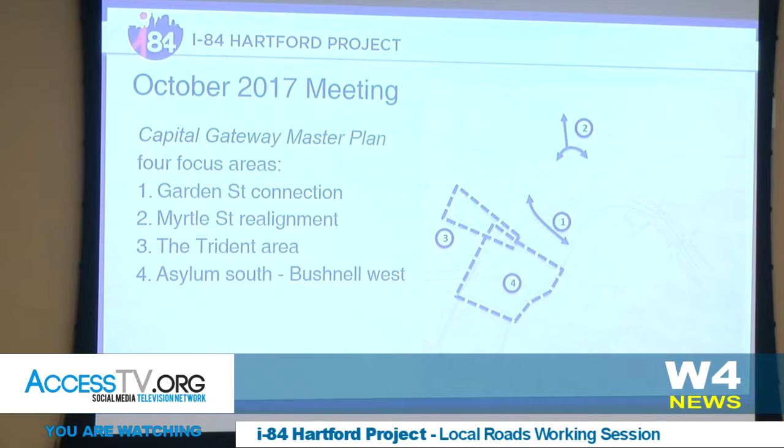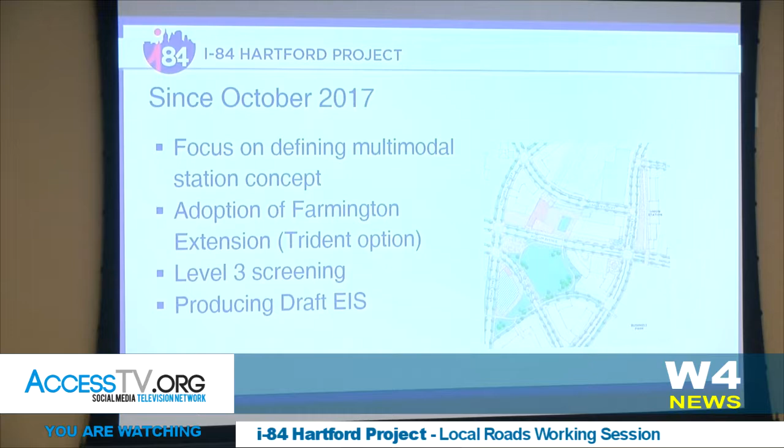So I'm just going to start with a few slides summarizing the overall I-84 Hartford program, where we've gone since October, where we are today in our overall schedule. So since that working session, we focused a lot on defining and screening and designing the multimodal station. Many of you were at the PAC meeting in March, saw how we've now advanced. We're recommending right now that 2 of those station concepts, one of which is depicted here on the screen, advance into the draft environmental impact statement. So that is moving forward.

There is some ongoing architectural design and transportation planning within the station, looking at how spaces are used and those types of next steps that we'll be presenting to the advisory committee either in August or September here in the next couple months. We have adopted the Farmington Avenue extension as the option for that Trident local road area. We are continuing to evaluate 2 other options in the DEIS, but all the exhibits you'll see here will consistently illustrate that Farmington Avenue extension.

We've conducted our level 3 screening, which I have a slide on here in a couple minutes, but we've really been focused on producing that draft environmental impact statement. So that document is due to DOT and Federal Highway this fall, and ultimately after a couple review cycles, it'll be published early next year, and then a public hearing follows for public comment on that document.

So in terms of our big picture schedule, we're really right here, just here in the beginning. So where that line is, we're still about a couple years away from that record of decision. So I did just want to kind of reinforce to everyone that final EIS, that record of decision terminology sounds very absolute and final, but over these intervening years, this design period, and then again, if you draw your eye to that construction line in the late 2020s, there will be many opportunities for the design to evolve.

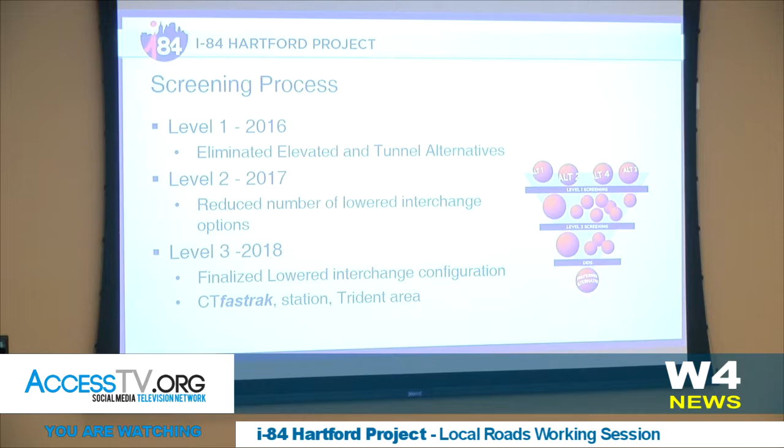So again, there'll be a lot more discussion about the station and CTfastrak at that next upcoming PAC meeting. For now, we'd really like to focus on the local roads. There'll be plenty of time to talk about the Trident, though, at this meeting today. So I'm going to spin off and just give you guys a little bit of our toolbox for how we've done this traffic analysis, kind of bring you up to speed with where we are and what we still have to do.

So the first step to all this has been identifying background growth that was done several years ago in setting up our initial models. And that's about 6 to 7% total growth between now and the year 2040 being the design year. So there is a moderate increase; no matter what we do with the road network, you will see that increase. Now, that is generally low, and we should say that those numbers were developed prior to several large projects being implemented. That includes the ballpark, that includes Downtown North. So as we move through these next several years, we will be looking into updating those traffic models to ensure they reflect the best information we have.

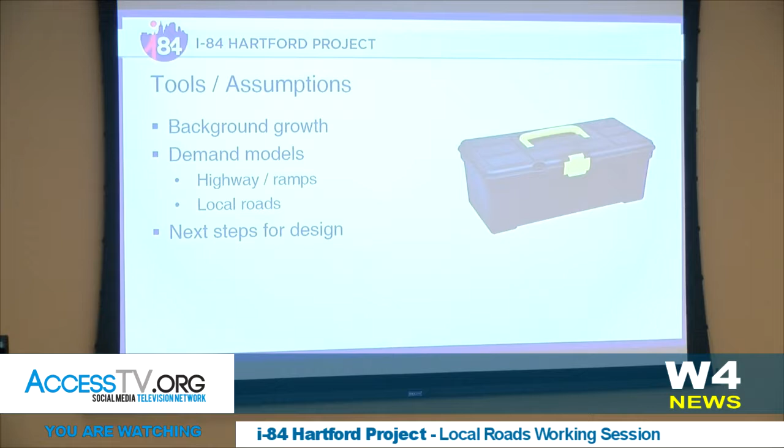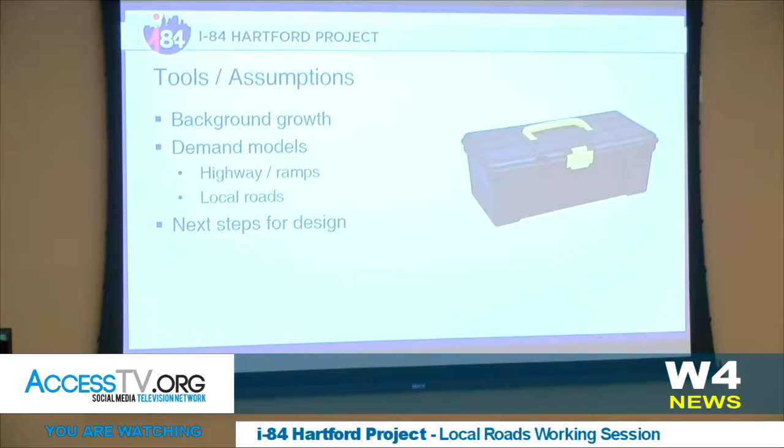So we take that background growth and we use it in what's called the transportation demand model. And that allows us to dynamically assess, if the travel network has changed, when we start moving ramps around, which is a big part of the lowered highway alternative, which I'll show you in a couple slides, it helps us evaluate where those routing patterns move to. So this model is very well calibrated to how the highways, how the local ramps work. However, the further we get away from those highway ramps into the local road network, it's not calibrated quite as well. And that's one of the things as we move forward into design, we'll start to work on.

I should also say, though, we're going to cover in the next couple slides a concept called diversion. And so that's something where you'll start to see cars, the further we get away from those local road increases, they'll start to revert back to the norm. And I have an exhibit to help you understand that here in a couple slides.

So first things first, this lowered highway alternative, because of the nature of it, does require these significant changes to the local road network and to the ramp network. A lot of the ramps we have out there today are only feasible because the highway is elevated or splits into eastbound and westbound at different elevations.

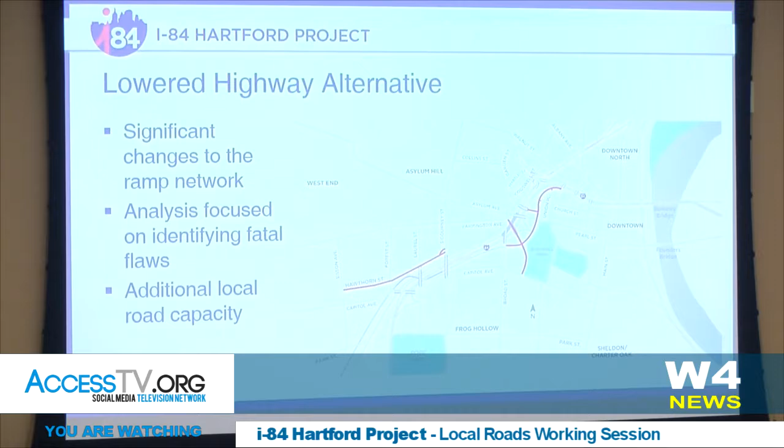Our analysis in identifying the interchange options we have today was focused on identifying fatal flaws. We didn't want ramps to back up onto the freeway, and we established a bare minimum performance for traffic signals. That was an average of about 2 minutes of delay for each user of the intersection. So anything worse than that, we eliminated.

The one thing I would like to highlight on this map is you can see these different red lines. These all depict new local street connections that are not there today. So one of these great opportunities we have with the lowered highway is because of its lessened footprint on the city, it enables us to open up space both for these new local roads and for potential economic development.

So I'm pretty sure I said diversion a couple of minutes ago. Thanks for no one making a face at me.

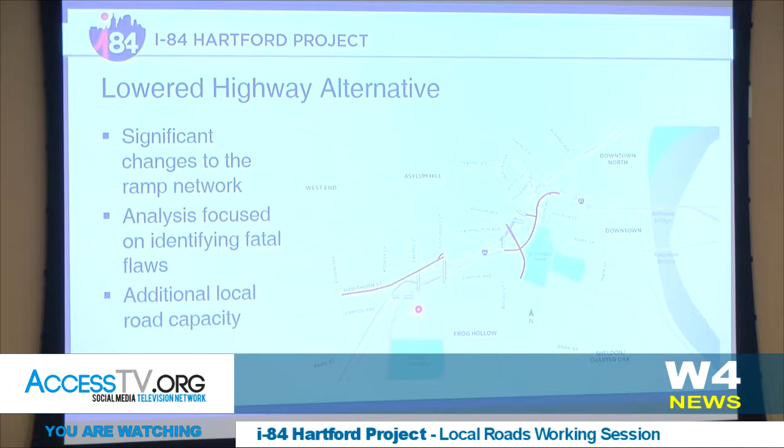What I really meant to say was traffic dispersion. This is a concept I was trying to get at a few minutes ago. So if you think about, say, we're proposing ramps onto Laurel Street. That's something that a lot of you have raised in the last few weeks that have brought us here. So if you envision that would result in an increase in traffic volumes at that point.

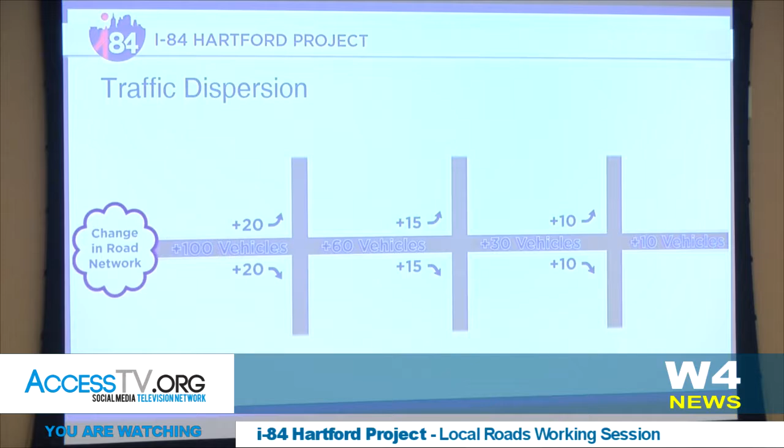Some of the key principles we've adopted in establishing these designs are, first of all, utilizing a complete streets approach on the local roads. We understand that by providing the necessary amenities for cyclists, for pedestrians, for transit users, we can encourage those who are willing to take other modes to get out of their cars and use these other modes of transportation that can lessen the demand on the network and create a more livable city.

We also want to point out that I-84 is a freeway, not a local road. Right now, about 7% of trips during both peak periods utilize I-84 to get between exits in Hartford. Ultimately, we see the lowered highway design as discouraging folks from doing that. There are some locations right now that make it really easy to do that.

And so we're proposing a local road network that will be capable of handling those 7% of trips off the highway. This will benefit I-84 in terms of its operations, but many of these streets that will be carrying that traffic also go through economic development areas. The extra eyes on the road there will help those businesses moving forward.

We've also placed the ramps at locations that we feel optimize paths to high volume destinations. So that includes anchor institutions, some of the major employers, destinations like that. So we intend to use local roads that are intended to convey those higher traffic volumes to those destinations.

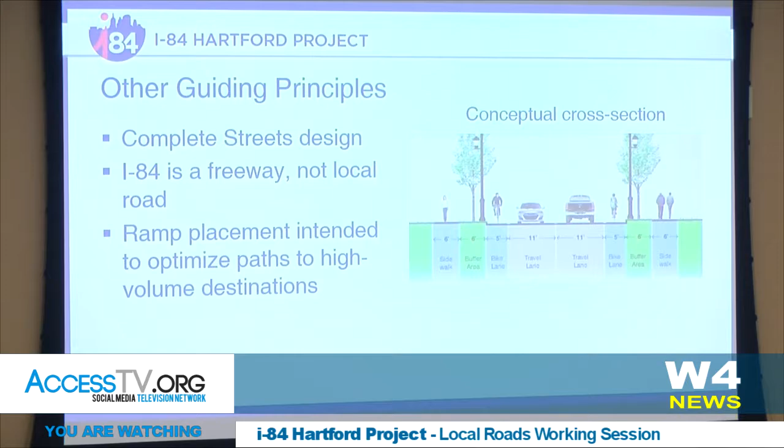I won't go through each of those bullets here, but generally speaking, the idea of this slide is to convey that we think the character and the travel speeds along these local roads define them more than necessarily the volume. If you can create a street that is a pedestrian-friendly environment, a cyclist-friendly environment, and has features on it to help control travel speeds, that can go a great way to potentially offset some of these potential increases in volume.

We do have some strategies. We actually presented them to Carol Padberg, one of the key stakeholders from ANA, last year. We have some slides we could go through. They're all set in the context of Laurel Street. This is Laurel Street over here. However, they really could apply to any of the locations in the project corridor.

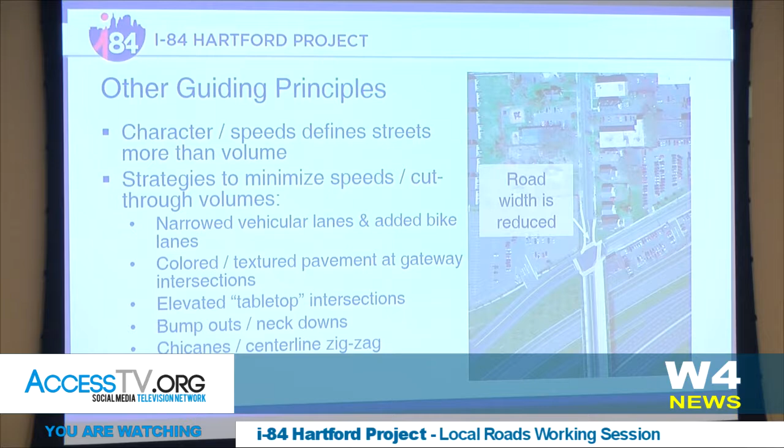So the last couple slides here, I'm just going to walk you through again our lowered highway alternative, explain what some of the changes that are on the table are for both the west side of the corridor and the east side of the corridor. And then I'm going to turn it back to you guys and let you guys point us to what you want to talk about. So here in the western part of the corridor, we have Park Street here towards the bottom of the map. Here's Laurel, Sigourney towards the eastern part of the map.

So again, we're proposing to start lowering the highway basically right when it crosses over Park Street. So it'll cross over Park Street like it does today, then start to descend into what we call that at-grade or cut section. Capitol Avenue will be reconstructed to pass over the CTfastrak Guideway and the railroad, as well as I-84. Same thing with Laurel Street. It will now be constructed over I-84, whereas it's beneath I-84 today. And then I-84 will continue below Sigourney Street. So again, Sigourney Street, Laurel Street, Capitol Avenue, all above I-84, different from today.

Meanwhile, we intend to reconfigure the Sisson Avenue interchange. Today, basically ramps from all four directions, that's eastbound and westbound on and off ramps, come all the way over here to Sisson Avenue at West Boulevard. We're proposing a much more compact interchange with eastbound off and on ramps to Laurel Street and westbound off and on ramps to Capitol Avenue.

Meanwhile, in this part of the corridor, we have a relatively minor realignment of the railroad and CTfastrak, which then would descend under the highway and under the railroad to cross to the southern side here and then extend easterly towards where it terminates today. So that's one of the bigger changes recently. Again, I don't want to spend a ton of time focusing on that. I just wanted to draw your attention to it here on the map.

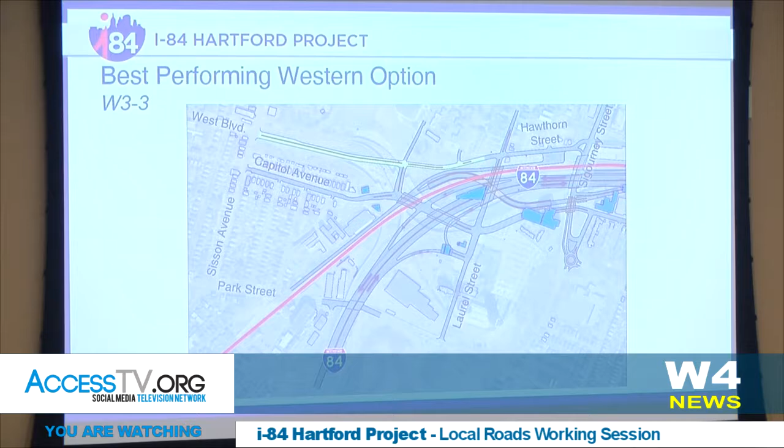So we've come prepared. These are some of the things we've heard in the lead up to the meeting that we thought you might want to talk about. That includes those Laurel Street ramps and how travel patterns would likely change there in the western part of the corridor. And then Hawthorn Street, there have been some questions about the alignment of that. How could it be optimized to potentially facilitate economic development in that vacant parcel bounded by Forest and CTfastrak and Hawthorne.

Then moving over to the east, so we've shifted here. So this is Sigourney Street, the I-84 I-91 interchange is just off the page over here. Here's Sigourney again. This is that Farmington Avenue extension we've talked a little bit about. Asylum Avenue, that new Garden Street extension. Here's High Street, right where it is today. So again, I-84 constructed at grade throughout this whole corridor.

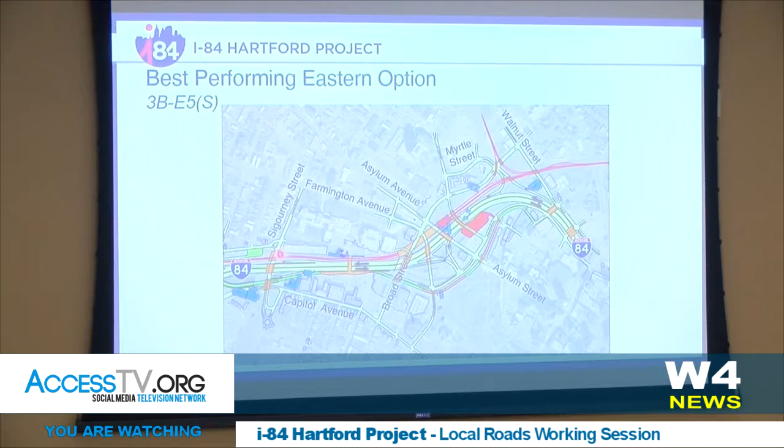Beneath Sigourney Street, beneath Broad, beneath that new Farmington extension, Asylum, Garden Street extension. So basically, I-84 beneath every city street it crosses from after Park Street all the way to the I-91 interchange. Also on this map, we've depicted that Farmington extension here, new local road adjacent to Bushnell Park, connecting down towards where those Capitol Avenue ramps go today, new Garden Street extension. And in the red, we've depicted one of our multimodal station options. So the rail station would go right in Asylum, bus station in the area between Spruce and the highway.

So again, just to highlight those new connections, there's that Farmington extension, Bushnell Park West, or Road A as we've called it, Spruce Street extended around to create one linear street, and then this new leg of Cogswell Street connecting to Edwards. So I'll flip back and forth slowly.

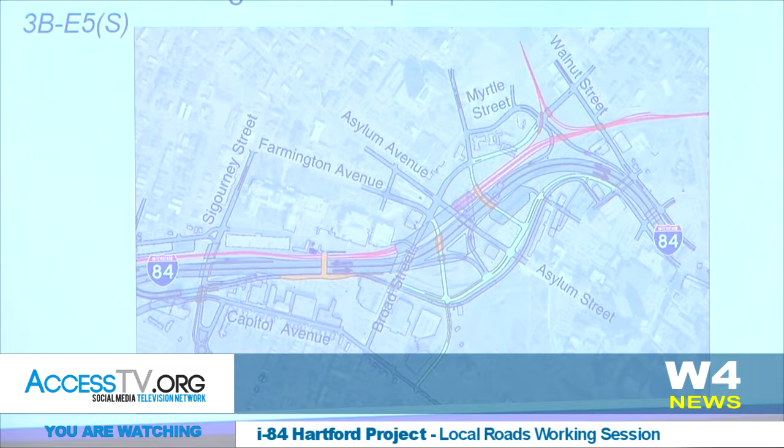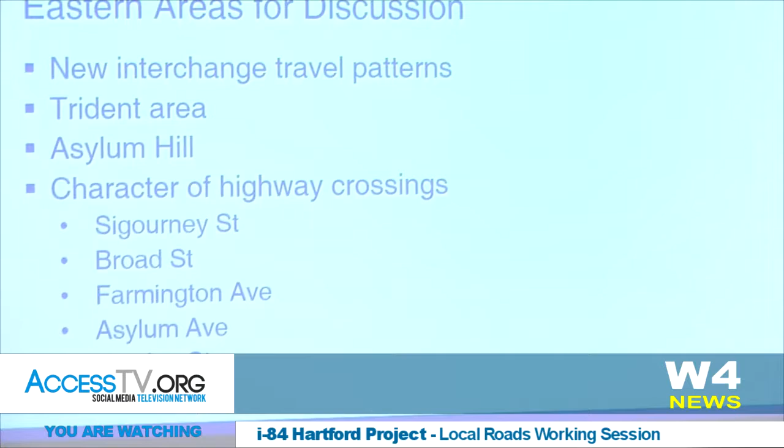So again, we have some locations to talk about here, to help you guys understand how we think travel patterns will change with that new interchange configuration. We just spent some time talking about the Trident area, Asylum Hill, and then we have some potential cross sections for what these new roadways crossing the highway could look like. We've identified complete streets elements that could be included at those locations.

So just want to remind everyone, we'd like to keep the multimodal station, CTfastrak, or this idea of potentially tunneling I-84 and I-91 to another time. There'll be plenty of opportunity for you to provide input on those things before any decisions are made. So with that, I'm going to ask Mike Morehouse to help me moderate the interactive portion with you. That was the presenting. We have quite a bit more content that we can go through, but I definitely want to respond to specific interests and questions.

Okay, great. Yeah, it's working.

Good evening, everyone. So this is your meeting, as Casey said, and there's a lot of additional content in this presentation. We can take it in any direction you want. So I guess I'll just start off by asking you, what is the topic of interest that you'd like to begin speaking about tonight? Is there a specific area you want to talk about? Tony?

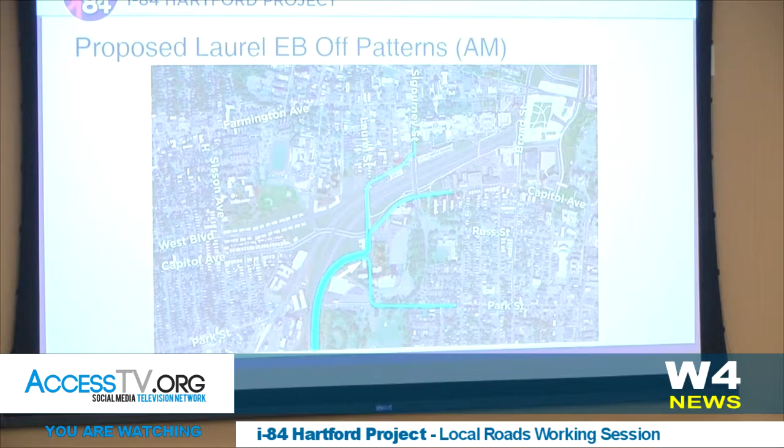Sure, it's a grid, people make their choices. I'm just asking what would be the preferred route; right now there's signs to the hospital. I think you would sign it the way I just drew it, given that those are what we call the higher classification roadways intended to carry that traffic volume. But we are a long way away from finalizing the final signing pattern for St. Francis Hospital. It just brings a lot more traffic into the neighborhood.

I just checked, and between all four ramps it's 30,600. So 20,000 on the ramps to and from the east, 10,000 to and from the south. And then downtown, the ramps that are getting closed, High and Trumbull Street. Yeah, let me add these up real quick for you.

Is that in both directions? I mean, are the ramps getting closed from 91 also? No. And just eastbound? Eastbound off, westbound on, and those add up to 14,000. And which westbound on? The Trumbull and High Street ramps, so they leave from Trumbull and High Street; eastbound they're signed for Ann Street and Main Street. So where do those cars go downtown?

We actually have some diagrams to show that. So I'm going to walk through instead of just trying to flip the one that just started. So we did kind of a whole set of these. Just to remind everyone, we're going to go by direction, and in the morning we're going to look at the off ramps, in the evening we're going to look at the on ramps. That's sort of the general pattern. So in the morning we had our eastbound off ramp that splits, right? It goes down to Capitol and it goes to Asylum.

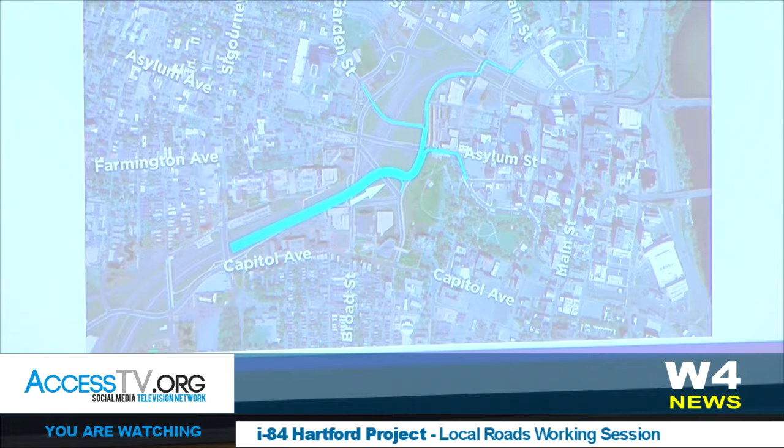So this is what we would replace it with. This is the eastbound off ramp to Bushnell Park West or Road A. And you can see a lot of the volume is now turning left and coming up to serve downtown and Asylum Hill. We're finding that a lot of the traffic destined for this Capitol area would likely take that Laurel Street exit, turn left, and then use Capitol Avenue to get in. That's not to say that they couldn't also, and there are some that turn right here and head down to Capitol. So it kind of offers two different ways to get to Capitol Avenue.

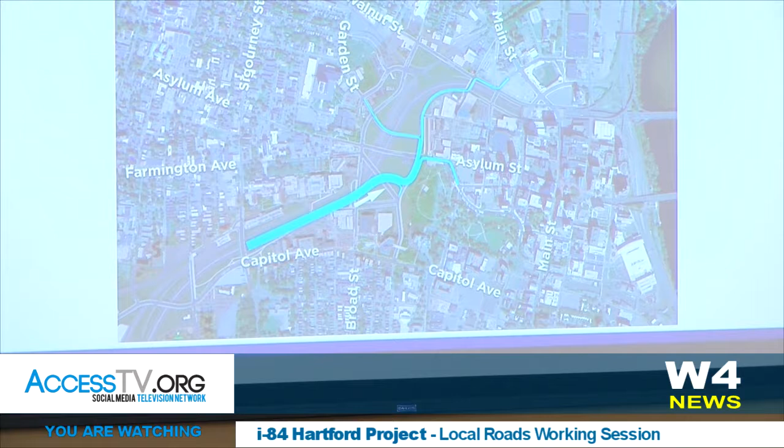And then the other, okay. Yep, I have three other directions to step through. So now getting on the highway eastbound in the afternoon, use the Broad Street on-ramp. You can see how much thicker that line is. It really carries a significant volume of traffic. So today you can see a big chunk of people filtering down through the Trident to turn left onto the ramp, and then many people coming up Capitol Avenue to get onto the ramp.

We'd essentially be replacing that with an eastbound on-ramp from that Bushnell Park West. So you can see it's now drawing traffic along 4 different roadways. So it's really spreading the approach a little better and a little more manageably, but still primarily drawing from the same area, Asylum Hill, downtown, but not as much in these western parts of the neighborhood, because this western interchange is now much better configured to serve access to the highway there.

Casey, that one doesn't look like it's taking anybody from downtown. To get east from downtown, you take... Oh, I'm sorry, you're right. The folks from downtown, I believe, are taking the Morgan Street ramp.

Now turning around, heading westbound. So this is in the morning, you have that off ramp to Asylum. You can see most of the folks using that headed off towards Asylum Hill, being replaced by that new off ramp to Edward Street. Kind of a similar pattern, although you can see this separates flows of traffic destined for the major employment center at the Hartford, as well as that at Aetna, along 2 different roadways.

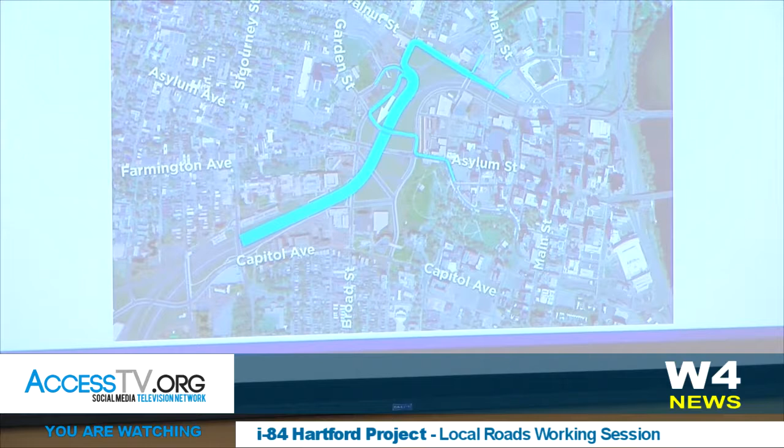So the Trumbull Street, if you're coming from Windsor in the morning and take Trumbull Street, is that... Unchanged. Oh, that is unchanged, okay. The off-ramp from 91 is not being modified at all. Folks coming from the north and the south, unless they're going west of Union Station, would be unlikely to change their route due to these specific changes to I-84.

And quick question, Casey, I know these reflect sort of the magnitude of volume, not actual numbers, but does this include that 7% background growth as well as any traffic that's changed as a result of the ramp reconfigurations? Yeah, these existing ones are really actually showing the no-build volumes rather than the existing.

Is it possible to get copies of these? I was thinking the same thing, yeah. Sure. Yeah, so study them. Yeah, of course. Was that all clear? Or not really? Well, some of it, but I got lost after a bit.

Sure, sure. I think one of the stories of all this is that the patterns are going to change no matter what, if this project happens or if it doesn't. I mean, look what happened when the baseball stadium went in. Anytime a development goes in, traffic patterns change. And I think the philosophy that the team and the DOT took was to really try to minimize the impact of change. And like Casey said, direct the traffic on the roads that can handle it, then design the new roads to absorb some of the overflow.

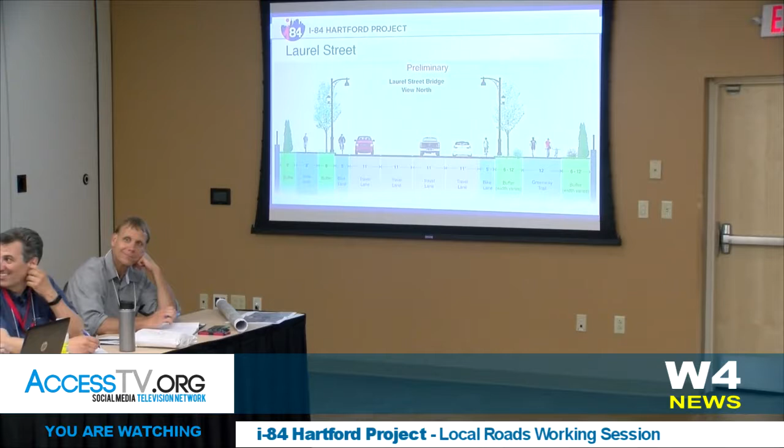Well, I probably won't be driving, so. But that's another story.

I just wanted to clarify your comments about your growth assumptions. Did you say that you were assuming a 7% growth in traffic volume by 2040? Yes, total, not annual. So it's just total volume growth by that point. I'm wondering where that came from. I remember when we started this, that Rich said that there would be a 1% growth assumption, and I don't know if it was yearly or over a period of time. And I sort of grumbled at the time and thought, let's just assume 0.

Why not just, I mean, this business of calculating traffic volume is so dependent on outside stuff you can't measure, and in particular, what's it called, induced traffic? Induced demand. The more you build, the more they come. What if you just took a policy decision that you were assuming no growth, particularly in light of all the alternative modes that we suddenly have? And you're not going to encourage any improvement for automobiles. Can you do that? And I have a related question, sort of related.

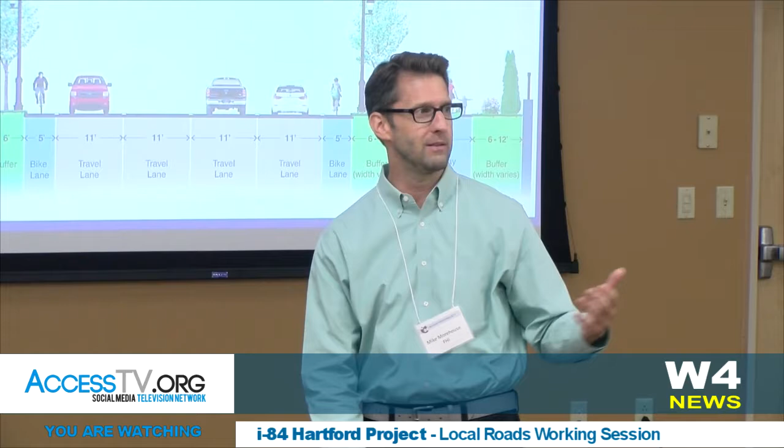So, in my opinion, this is all really good news. We can forecast out a bit of growth. We know the network can handle it, but that's not the outcome that we have to live with if we all make different choices.

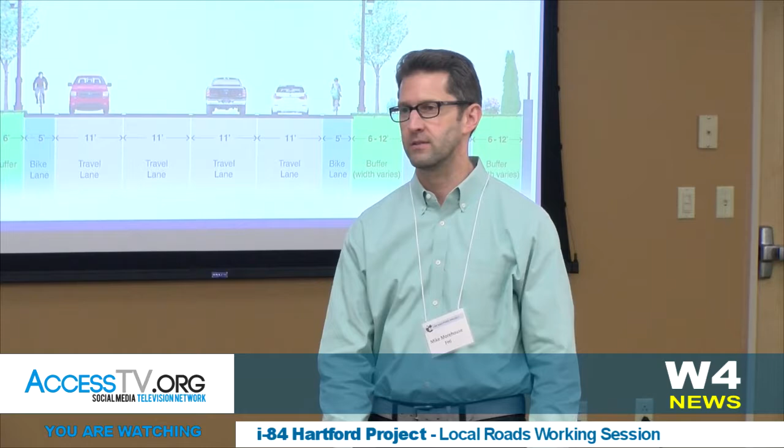Just a personal view, and that is that those blue lines that show the relative volume of traffic coming in and going out is enormously helpful to me. Good job, Nick. Yeah, Nick worked hard on those.

We have a comment in the back here. This is somewhat unrelated, but I've taken a whole bunch of grief about the stone viaduct that currently is encircling Bushnell Park. And there was recently an article in the Courant about utilizing that in part for the CTfastrak, which didn't make any sense to me. Am I missing something? And what's your current thinking on either maintaining it or getting rid of it?

So this is sort of a rabbit hole conversation, and I appreciate your brief. I mean, it could very well take up the next... We'd be happy to kind of discuss that towards the end of the meeting. I agree. Okay. No, that question will be answered before any decisions are made on the final disposition of CTfastrak. Tony and I have to fight that.

We'll get the jumbo boxing gloves for you.

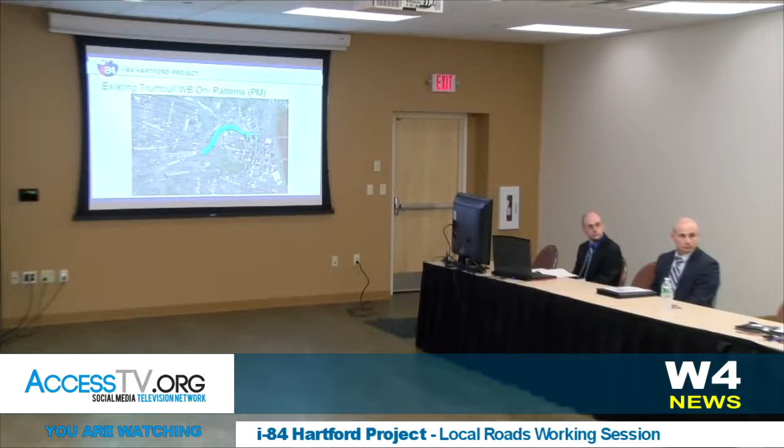Yeah, just a quick comment. I just wanted to point out that in the city of Hartford, involving multimodal transit and active transportation is absolutely critical to this project, not as some giveaway redevelopment program, but as a recognition that over 30% of households in Hartford do not own a car. In the neighborhood just north of the project corridor in Clay Arsenal, 50% of households do not own a car. And nearby in the Albany Avenue corridor, 42% of households do not own a car. And that is even before we have a system that deals with that competently. So I just wanted to make a point that those numbers are significant.

My understanding is that over 75,000 people come into Hartford to work every day. I believe the number is somewhere there or above it. Do you know what percentage of that Connecticut state office workers pose, who could be, if encouraged, taking public transportation? You mean once they get free parking? I do not know that answer. In their union contract. Well, the labor contracts have to be negotiated. It doesn't matter. I'm not asking about that. What I'm just saying is that if it's a real problem, and the DOT is a state organization, and these other state employees come in, there are quite a number of them, getting them off the highway would help truck transportation as well.

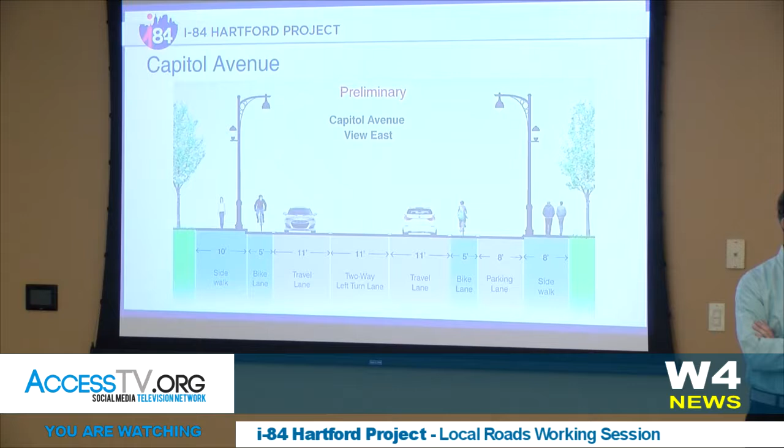So we do have a set of typical sections taken at some different locations along the individual roadways. This is Capitol Avenue, kind of in front of where those DAS buildings are. And so you can see the intent here is to provide a bike lane on both sides of the street. I don't think you have that width. You don't have that width. It's not even a setback you could take. Capitol Avenue is 2 lanes in each direction. This is proposing what is effectively a road diet where it would have 1 lane in each direction. Wait, you're talking about the section from Laurel? No, east of there, like from Broad Street, past Flower, past the DAS building.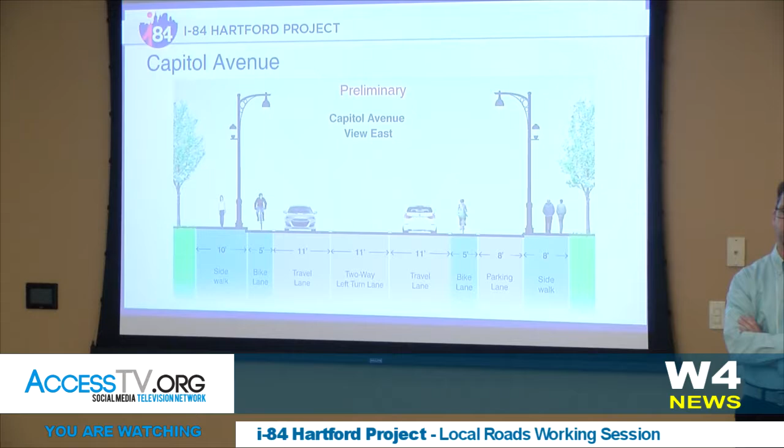Right, right now there's 1 lane in each direction. There's a parking lane on one side. Well, but then at rush hour, parking is forbidden, and it's 4 lanes. No. On Capitol Avenue? Yeah, there's a sign. Capitol Avenue where the improvement was just done. Oh, no, past the Park Terrace. But what I'm saying is when you show the maps that indicated people from downtown who are going to the Capitol area, they're all gonna use that Laurel exit, and they're not going to disperse off of Capitol. They're all gonna come down Capitol to the south end of downtown. That's what your maps were showing, and I think where you're going to have a problem is from Park Terrace to Broad. Absolutely. You don't have the width, and the character of those blocks is very different than the character of where you get off of the highway onto Capitol today.

You have some wide streets before you head down to Washington or whatever. So I just think that's an area you really need to look at, because you just do not have the width. I was driving Capitol Avenue today in conjunction with preparing a comment on the bike lane currently proposed. And I noticed there are 5 lanes in front of the Capitol and the State Supreme Court building. No bike lanes. There are turn lanes, lots of lanes there.

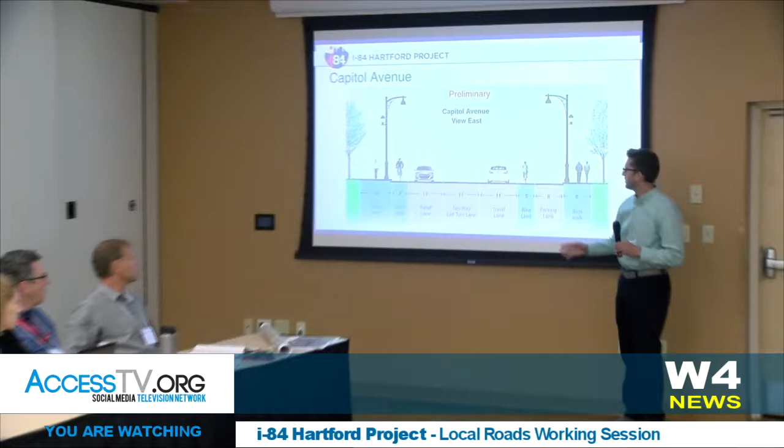Are they 10s or 11s, Sandy? Do you know? Oh, they're not 11s. They're 10s. And you'd be lucky if they were 10s, I think. Right. Do you know, Kevin? I think the mistake, I want to get back to the original question too, but I think maybe the error is this parking lane. This might be a typical, and there might be places where parking can exist, but maybe in the space you're talking about, it just simply can't. But I think this cross-section depicted the removal of one lane and converting that to bike lanes.

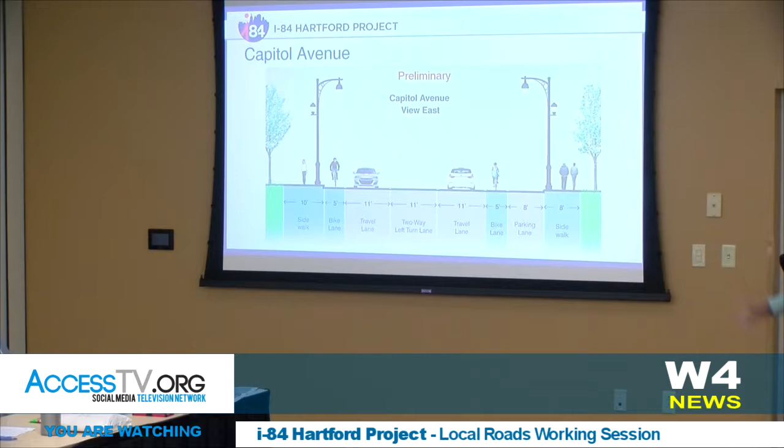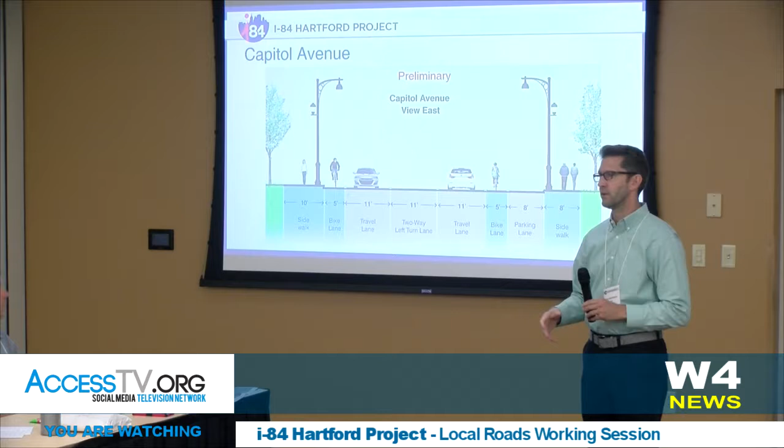We'll revisit these typicals, but I think what Casey was going to show was a series of different treatments for bicycle accommodation. So we want to slow the traffic down first of all. And that's one of the biggest safety improvements we can make for cyclists. But as Casey said, there's areas in the city where we're looking at cycle tracks off to the side or protected bicycle lanes. On the slower, lower volume street, bicycle lanes may be sufficient. But we're trying to include some high level of bicycle accommodation in almost every street that we're touching, we're reconfiguring. So there's a range of treatments, protected intersections in some locations as well, right, Casey?

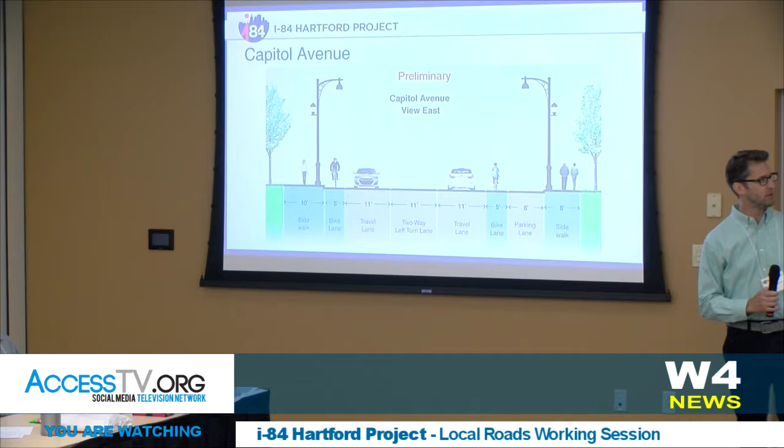You might be able to do that near the highway where you're going to be tearing up everything anyway. There's no place else in the city that has that kind of right of way. Maybe North Main Street. I mean, there's just a couple of arterials that even begin to have adequate right-of-way to do anything like this. How do you want to resolve the question?

Yeah, I mean, I think, look, this is where I kind of relate back a little bit to our stage of design, right? We're talking about construction in 2028, design from 2020 till then. I mean, there are a lot of things we don't know. And I know Nick's looked closely at that corridor, and I know he's confident in the lane arrangement he's proposed. There is, like Mike said, the potential that parking lane is just extra. That looked like it's probably correct.

We'll certainly be revisiting these over many years as we evolve this design. We're certainly going to make sure, to Sandy's point, that if we're demonstrating that traffic is using an arterial to get somewhere, that we're accommodating it. But again, the intent is to provide as many of these cyclist pedestrian amenities as possible.

Could you address the Trident area if we're through with this? Sure. Would you like me to jump there now, or do you want me to carry through with some of these cross sections? Yeah, are we through with it, or what else would you like to know about the bicycle? I'm fine moving beyond the cross sections, believe me.

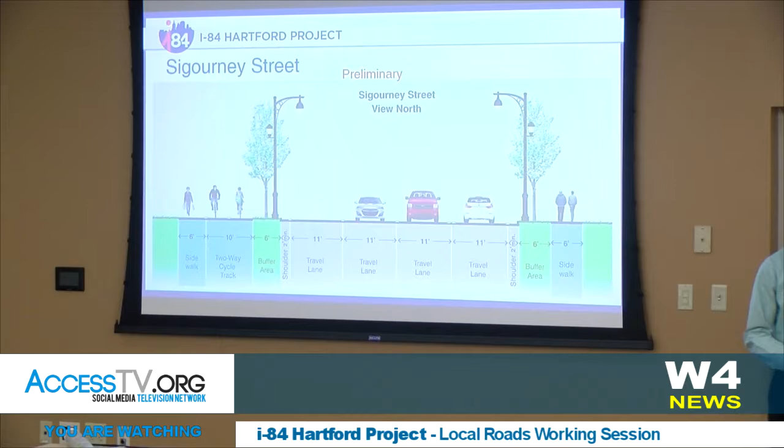So this is a way to separate cyclists away from those ramps. But yeah, just consistently we are looking to do exactly what you say, provide a safe environment for cyclists and comfort level for drivers as well. I think we want to shift over to the Trident now?

Can I just ask one question about Hawthorne? So if you're moving the bus station, does that mean the buses won't be on Hawthorne? The question was if you're moving the bus station, does that mean the buses won't be on Hawthorne? The Sigourney Street CTfastrak station, is that right? So the ultimate final condition of that Sigourney Street station is yet to be decided. We're continuing to work with DOT's public transit arm on that.

There have been some suggestions that it could potentially be removed and replaced with a station on the south side of the highway. That's where the busway could potentially be realigned. We haven't really decided that yet. And are you doing work on the Hawthorne-Sigourney intersection, if it's now going to not be a local street but a major access road?

Yeah, we have looked at potentially adding a lane to Hawthorne Street there as it approaches Sigourney Street, just that little section there to provide some extra capacity at the intersection. Be interested in more details on that. Sure. Well, we're going to just take a minute to go through the Trident, and then we'll get to you. Okay, thanks.

So the Trident, everybody's favorite topic. I've been using this little image here for like 2 years now. So one of the big things I do always like to point out are the significant changes we expect to see in how folks will flow through this series of intersections, particularly in the afternoon when you have today with the Broad Street on-ramp right here, large volumes flowing down onto Broad Street to get to that on-ramp.

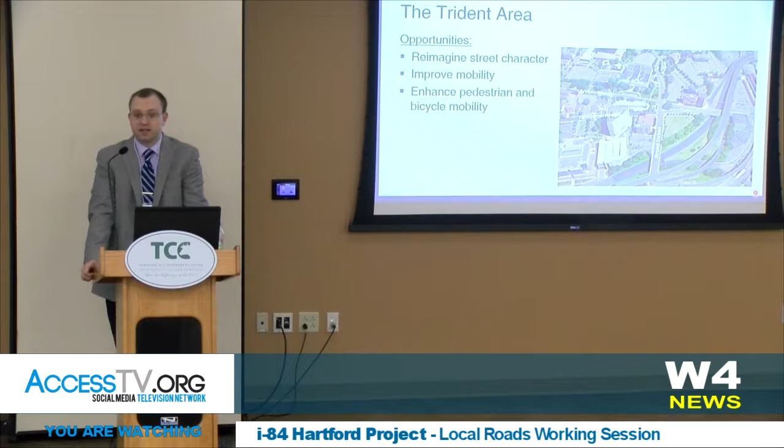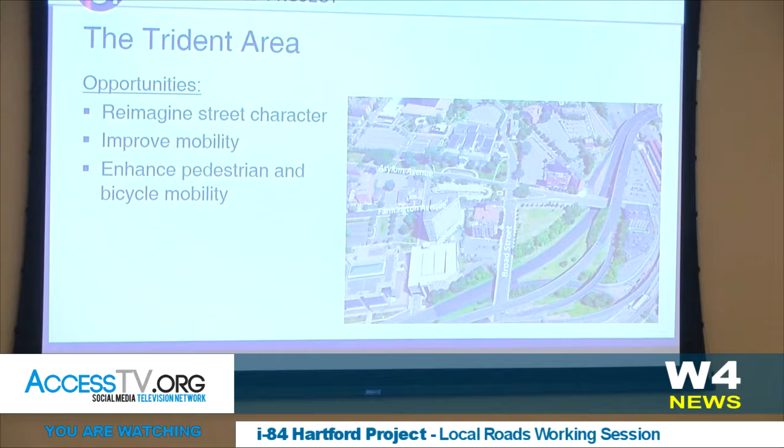And now, of course, with that ramp moved over to Bushnell Park West, we do see some changes in directionality and priority through that corridor. In the PM today, it's kind of mixed, about half and half, with east-west traffic versus traffic coming north-south. Under the proposed lowered highway, we do see much more traffic being east-west.

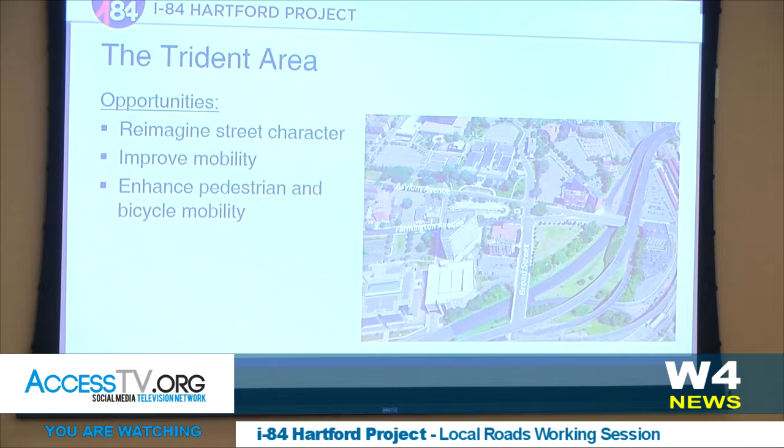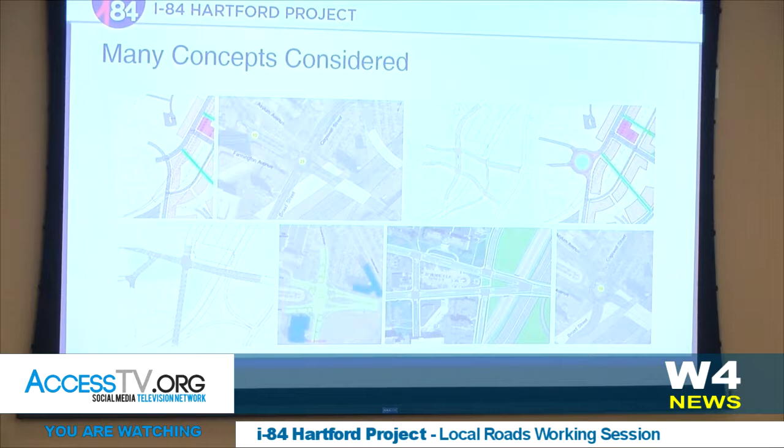That said, we have considered many concepts here. We've been through a dramatic range from kind of crazy roundabouts that look like sea creatures to cutting roads off to one-way to all these different things we've tried. I would say we've really analyzed 5 in detail. The roundabout we talked about at one of our advisory committee meetings and at some of these local street working sessions.

Ultimately, the traffic volume is just a little bit higher than a single lane or even a turbo roundabout can really handle with a manageable number of lanes. So we'd laid that out for you guys, and it looked very complex, difficult for pedestrians to cross. There may even have needed to be pedestrian signals on some of the approaches. So ultimately, we just didn't feel like it was the right solution.

We'd also talked about an idea of a western shift where we would push the intersection of Farmington and Asylum further to the west and then have one street coming to a 4-way intersection with Broad and Cogswell.

Ultimately, under NEPA, that would have required an additional property acquisition, and as things have to be stacked up against NEPA, it just didn't pass muster. Just on that basis alone, it also would have been pretty sizable, not really pedestrian cyclist friendly, but ultimately that was ruled out as well.

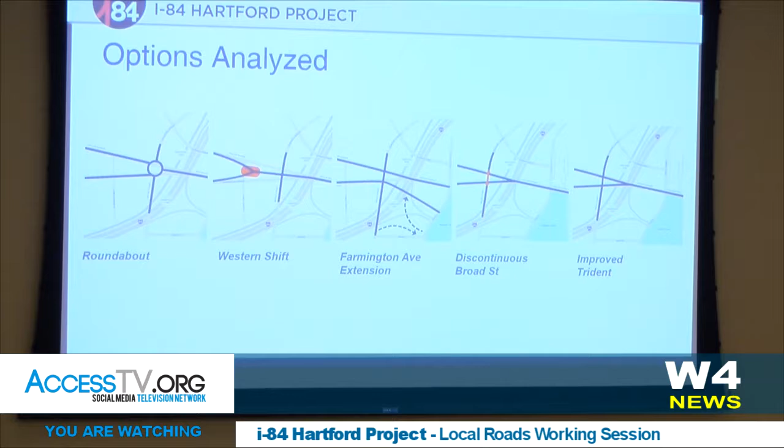So that now leaves us with 3 options that we are carrying forward for continued evaluation in the DEIS. That's the Farmington Avenue extension, the discontinuous Broad Street, and what will be a new one to many folks around here, although it's really an old one, the idea of just improving the signalization at the 3 primary intersections, keeping all the streets open, keeping everything 2-way. Ultimately, that had been something we didn't really find favorable early in the project, but the implementation of that Garden Street could potentially reduce traffic volumes enough to make that manageable. So I can walk through the 3 just to make sure everyone understands.

So it's our Farmington Avenue extension. It's something that was ultimately proposed by the city and their consultant team, something that they feel really could help generate economic development on these parcels here to the east of I-84 that are currently occupied by the freeway on and off ramps that could be vacated by this project. So the idea here is we take Farmington Avenue, and then before it gets to the Trident area today, we start to swing it down to the south and intersect it with that Bushnell Park West.

Broad Street is continuous across. This curve does not require impacts to any of the properties, specifically that YMCA, or YWCA. It does not impact that. It does provide this extra connection across the highway. We are continuing to assess how the travel patterns work. We are seeing that a large number of people headed along Farmington Avenue will want to make this type of a maneuver, which is a little less efficient than we like. However, others will point out that it does create an extra path to head towards the southern part of downtown. So we are continuing to, and we feel that our next generation traffic model will really help us look at these 3 remaining Trident alternatives at a higher level than we've been able to yet.

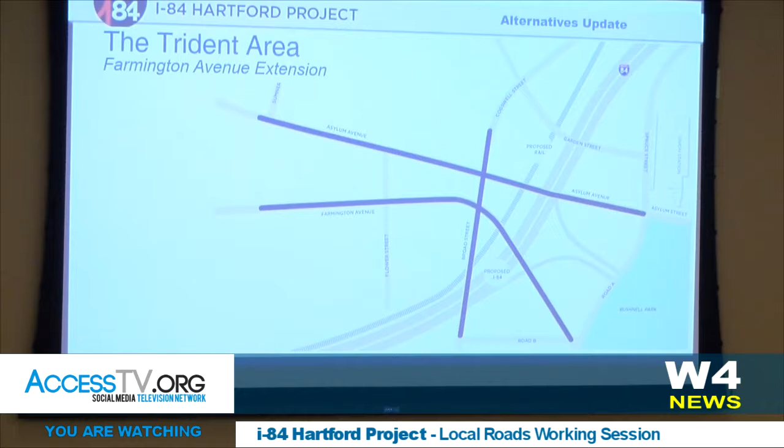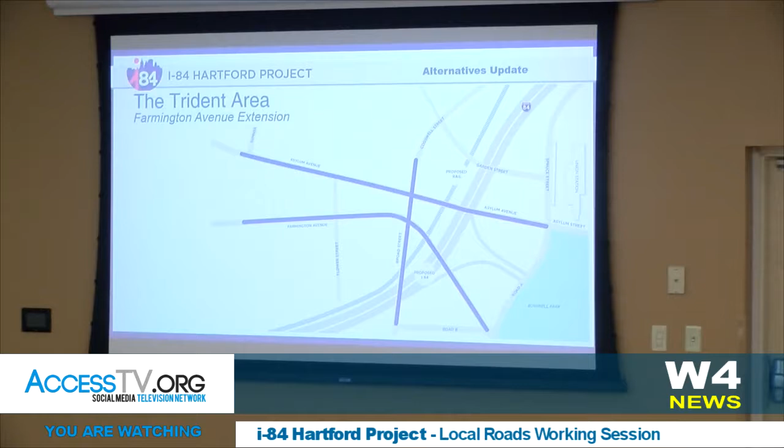That difficult maneuver would have to be performed by major bus routes also. That's right. Essentially changing from going downtown, changing from a left lane to a right lane to take that right curve or vice versa? No, it's a good point. We have considered that potentially buses would be encouraged to use Asylum Place to do that maneuver in a little bit less physically constrained area, and maybe that way they're set up approaching the intersection of Asylum and Cogswell a little bit better. But that is a good point. Truckers as well. This map makes that area look a little bit smaller than it really is, but that's a fair point as well about trucks in that short area between Asylum and Farmington.

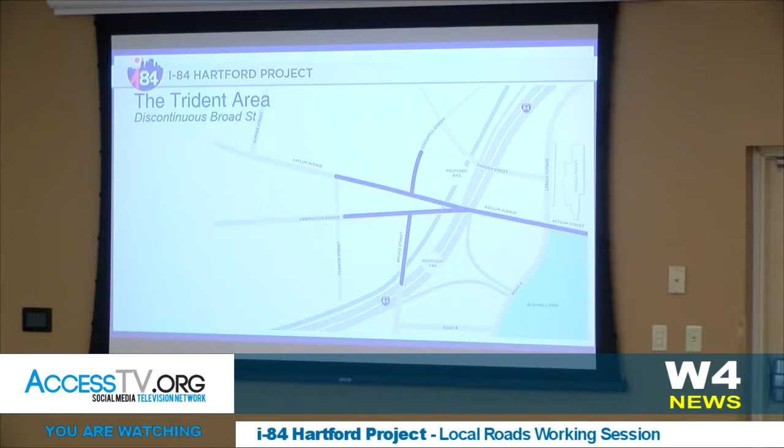So the second option we've talked about since last summer is the idea of making Broad Street discontinuous. This came out as sort of the optimal traffic performance scenario where these three intersections would now all be signalized. Remember, today Asylum at Farmington, that little split there isn't really signalized, which is an interesting condition. So it would be signalized under this. So you basically have three-way traffic signals, which from an operations perspective would work fairly well, would allow some smaller roadway cross sections. However, Broad Street would be not accessible to cars between Asylum and Farmington.

We would look to provide bicyclist pedestrian connections through there, but still vehicles would not be able to make that connection today, would have to seek alternate routes. There are some potentially available up this Bushnell Park West and Garden Street, or down around via Asylum Place as well, but we have heard relatively frequently about the displeasure with the severing of Broad Street, so we are mindful of that and keeping some of these other options on the table as well.

Lastly, we've really brought this quote-unquote improved trident back to the table recently, which would again require signalization of all these three intersections. So that's Broad at Farmington, Farmington at Asylum, Asylum at Cogswell. And we're seeing basically here with the new road network under the lowered highway, and this change has really come since the city's consultant gave us this idea for the Garden Street extension, that pulls some of that traffic volume out of this intersection and allows maintaining that existing configuration in this fashion.

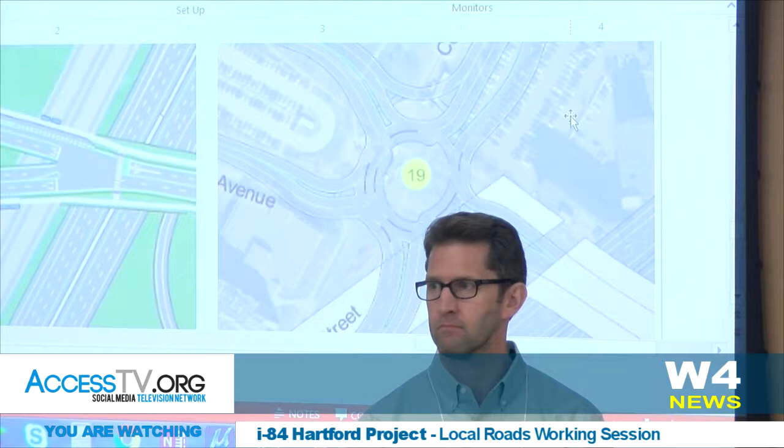Yeah. Other questions on the Trident? I know you had a question back there. I haven't forgotten about you. Okay.

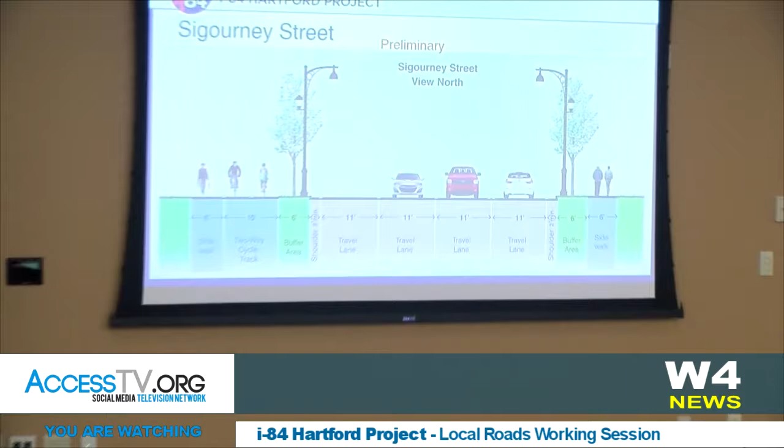Back to Sigourney Street. I saw that you had an extra bike lane in addition to what's already there. We already only have a foot to put snow on. Where's that bike lane going to go? And where's the snow going to go? Oh. That's interesting. Snow? The Sigourney Street Bridge will be completely reconstructed as part of this. So if this does indeed represent additional width than is out there today, in our minds, there's no reason why we can't provide that.

So it was that we're now providing 6 feet between the curb and the cycle track. Is that your question, how much space is there to store snow? How far does that extend up? How far north does that affect Sigourney Street? I think the intent would be, as DOT is, to carry the two-way cycle track through Farmington Avenue. Whether the cross-section could be quite this generous in terms of a buffer area once we get past the bridge, it very well may not be able to.

I do know that as we approach the intersection at Farmington, we don't have 2 lanes in each direction southbound. Correct me if I'm wrong. There are currently 2 lanes, but they're only 9-foot lanes. Oh, gotcha. And the bus generally takes the whole lane. Gotcha. So I can't commit to the 6-foot buffer in those areas, definitely by the time you get to Asylum. Yeah, I know for a fact that that block between Farmington and Asylum is extremely narrow. I do know that, yeah.

Would there be any talk of making that one travel lane? I think we would be open to anything that would work, something like that, if it could be proven to support what we're expecting to see. I think that's what's going to have to continue to evolve. It kind of plays back a little bit to the reconfiguration of the Western Interchange. Does that change how some folks use Sigourney Street to get to points north? We'll just have to be very mindful of that. But that's certainly something we'd be willing to consider and evaluate.

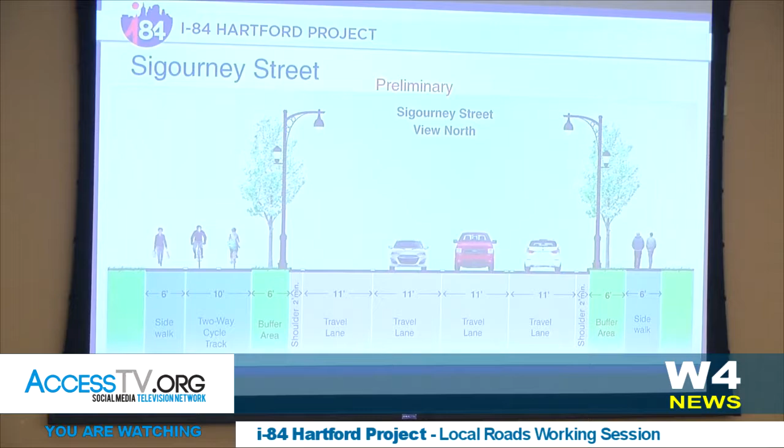You had another question? Different question, yes. He had mentioned the breakdown lanes on the eastbound. Coming from Manchester today, there was a car accident and of course traffic was all backed up all the way. So are you saying that the improved highway would include more shoulder space, so that traffic accidents could move aside and traffic would flow a little better? Yeah, that's exactly what I'm saying.

So right now, the shoulders on I-84 range from being non-existent to 4 feet, with the occasional really wide 8-foot stretch, but for a very limited length. So we're proposing a minimum of 10 foot, which is the minimum standard for a freeway. We are evaluating whether we could potentially fit 12-foot shoulders due to some of the higher truck volumes in the corridor. And our preliminary look is we're very likely able to do that.

It's interesting, when we talk about congestion on the highway, I don't know if everybody realizes it, but there are, I think, 2 crashes a day along this section of highway somewhere. A lot of this congestion is just being created by incidents that can't be cleared. Just the fact that we're going to have a shoulder is going to make a huge difference.

Different question. Speaking about Garden Street, I know that there was some discussion about closing Garden Street or whatever. I don't know, where are you on it? Not a lot has changed for us since that presentation we made at ANA in March. We've kind of let the city guide and frame that conversation about potentially closing the city street, and to our knowledge at this point, their position remains they don't want to see any local streets closed. So at this point, that's where we are. We do not envision our project actively doing that. If a separate project were to be moved forward by the city, we would react to and account for that.